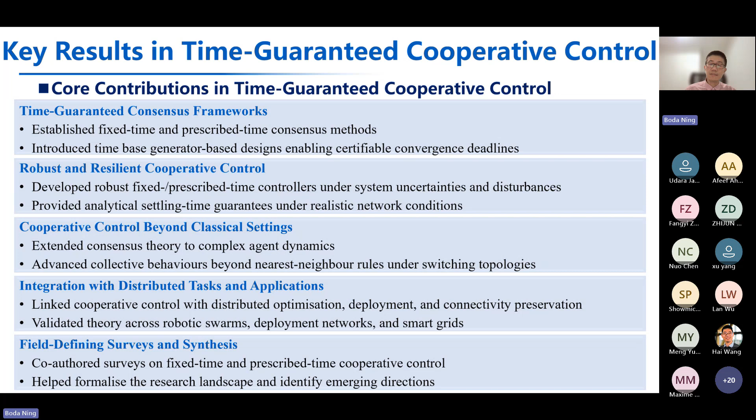And yeah, so this slide just shows our core contributions. Now, I would like to give one simple example to show how the cooperative controller works.

Let's assume an agent i with a very simple dynamic, the single integrator dynamics: x_i dot equals u_i. Here x_i is the state of the agent, and u_i is a controller to be designed, and the cooperative control of consensus can be achieved by using u_i equals the negative sum from j equal 1 to n of a_ij times

(x_i minus x_j). So here the key part is a_ij is a weight between neighboring agents from x_i to x_j. With this kind of controller, the consensus can be achieved when the time approaches infinity. So this is a conventional cooperative controller u_i. I just want to take this as a simple example to illustrate the motivation.

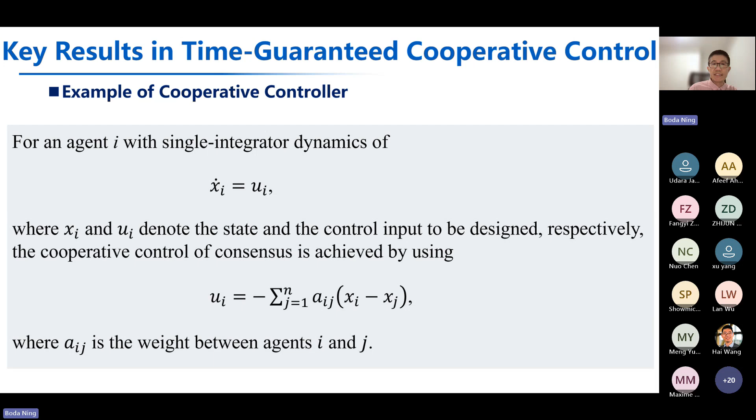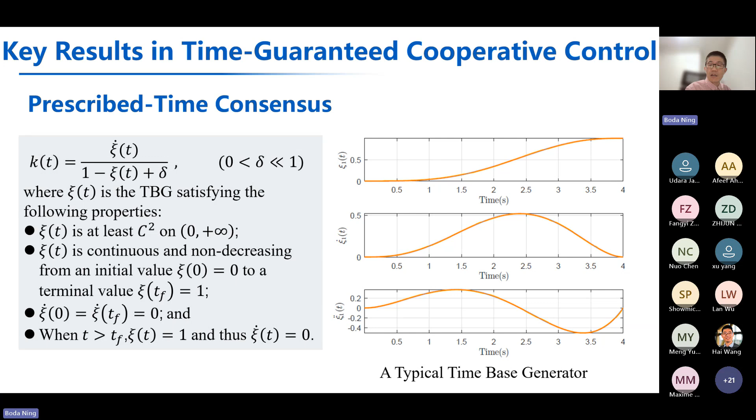So based on the TBG, we add that part on top of the original consensus controller. Basically we introduce this time varying gain when we're doing the summation. In this case, the settling time, which we call T_f, will be a prescribed time instant for arbitrary initial conditions.

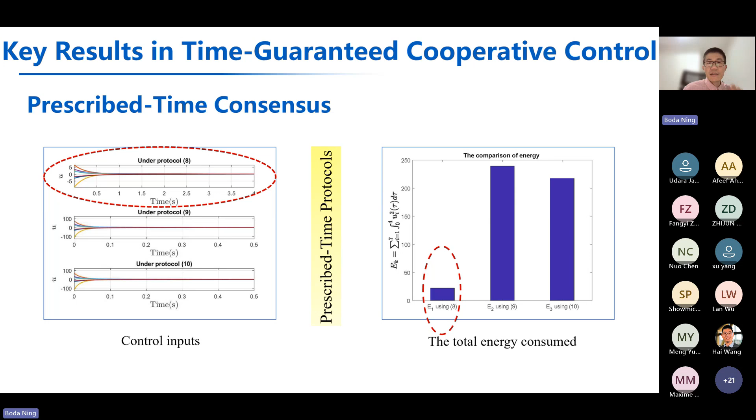Also on the left hand side, you can see the magnitude of the maximum control input is about 5. When using the fixed time one, the maximum magnitude is almost 100. So that is the key difference between the fixed time and prescribed time controllers. We have talked about the difference between the fixed time and prescribed time cooperative controllers, and we have applied those cooperative controllers to different application areas.

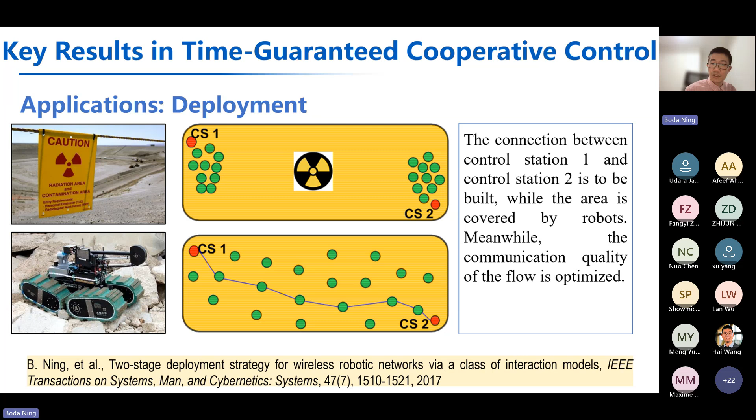And we also apply the controller to the application area of deployment. This is quite similar to the previous application of dispersion, but in this case, we consider 2 different groups, and those 2 groups will merge to cover a big area, and also build some communication flow to make sure the communication quality between CS1, the control station 1, and the control station 2 is reliable.

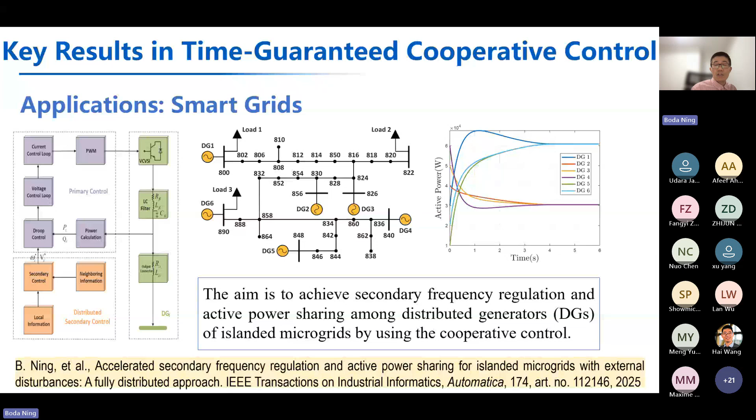And also we have applied our cooperative controllers in smart grids. For smart grids, the target is to achieve frequency regulation and active power sharing among the distributed generators. For example, in 2025, we published our latest results in this area using fixed time secondary frequency regulation controllers to achieve the frequency regulation and active power sharing for microgrids with some disturbances. Also, our approach is fully distributed without using any global information.

And also, I want to emphasize we have applied our controller to cable-driven robots, and this is a very interesting topic that was done when I was at Swinburne between 2020 and 2024. This is an interdisciplinary project. It combines civil engineering and automation engineering. We design cable robots to achieve 3D concrete printing.

And I have a small video here. You can see in the middle there is an effector, and that is controlled by eight cables. It can move very smoothly in the lab. And the middle picture shows we have already printed some concrete samples.

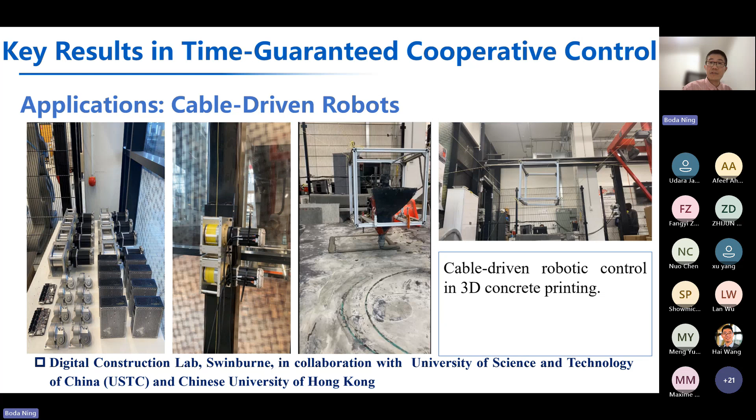But because in 2024 I moved to Auckland, this project was discontinued after I moved. But anyway, this topic I want to say is really interesting. It's the first time we used a control strategy integrated with civil engineering techniques. So that is cable-driven robots.

Now, I have talked a lot about the cooperative control of multi-agent systems. Now let's move to the second part. I would like to focus on introducing the application to connected automated vehicles. As mentioned before, for multi-agent systems, the agent can be a lot of things: robots, drones, underwater vehicles. So here we consider the automated vehicle as a type of agent.

So here we model this kind of vehicle using third order dynamics: tau_i times the third derivative of p_i plus the second derivative of p_i equals u_i plus omega_i. So this is the model we used for the automated vehicles. Of course, for the vehicles, you can use other dynamics to describe the system.

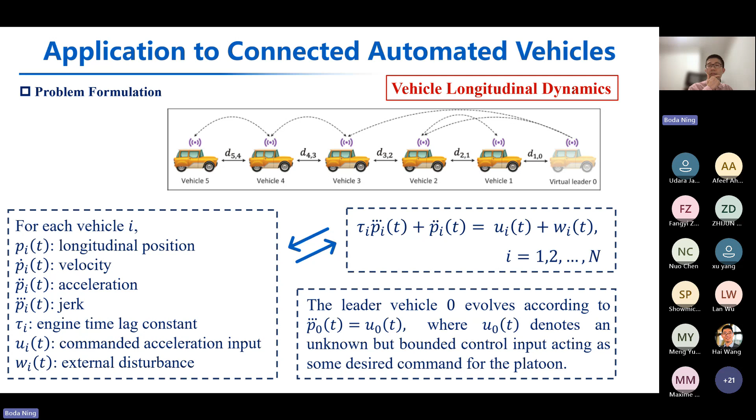And also we need to define the spacing, or we call it the spacing policy. Here each follower vehicle i in this team is required to follow its predecessor i minus 1 while maintaining a desired inter-vehicle distance we call d_i,i-1. And we also use another notation, d_i, as the desired distance. Here we consider a very simple spacing policy, the constant spacing policy, which means d_i,i-1 equals d_0.

So next we consider the information flow for the vehicle team. Two different cases are considered. The first case we call the undirected communication topology. In the second case, we consider the directed communication topology. The main difference between those two cases I can show you using A34, the communication link between vehicle 3 and vehicle 4.

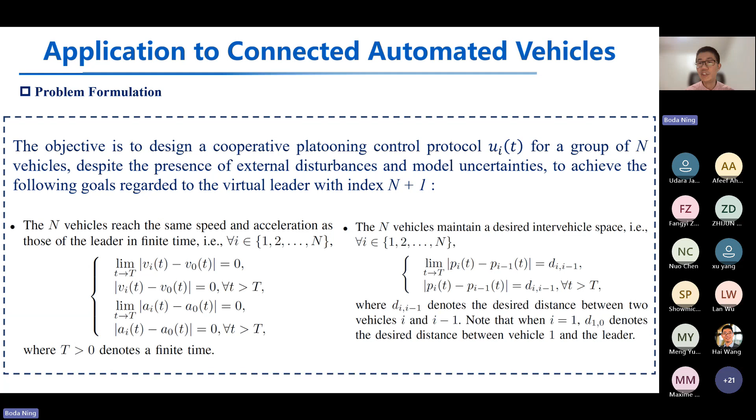On the other hand, we want to make sure that the team, all the n vehicles, can maintain a desired inter-vehicle spacing, which means the inter-distance d_i,i-1. So here p_i minus p_(i-1), the distance will be equal to d_i,i-1 when t is bigger than uppercase T. So this is the problem.

Based on the observer, we further construct a nonlinear variable Si in this form, equal to e_ai plus an integral term. Based on this Si and the previous observer, finally we can design the controller at the bottom. And here for Ui, you can see we also have another time-varying parameter, alpha 4(t). So alpha 1, alpha 2, alpha 3, and alpha 4 are to be designed later.

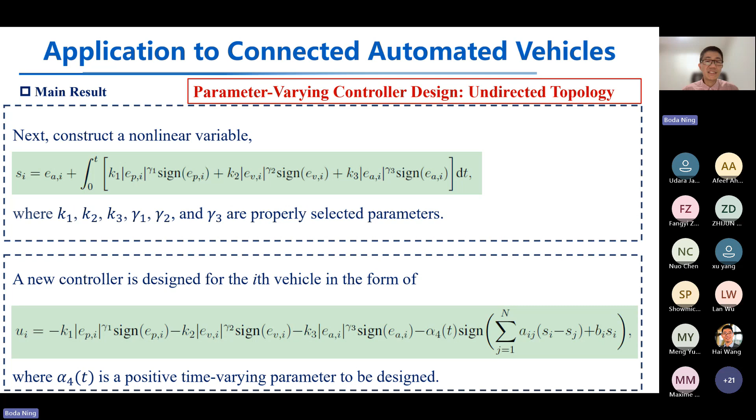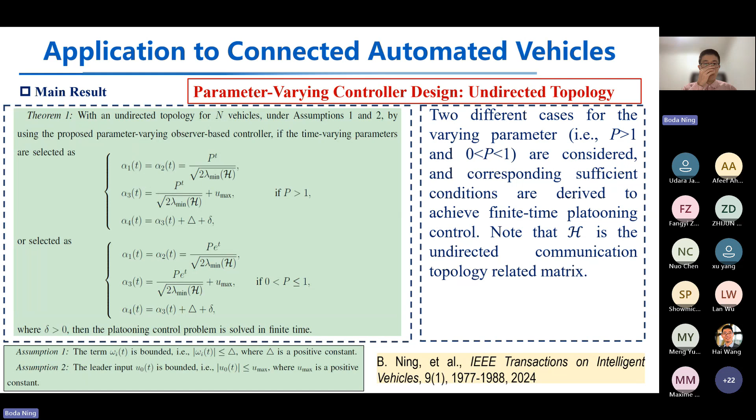Now, the main result of Theorem 1: we can design those four time-varying parameters as shown in this slide. Here we consider two different cases. The first case is p larger than 1. The second case is when p is between 0 and 1. For different p, we design different time-varying parameters for alpha 1, alpha 2, alpha 3, and alpha 4. And finally, the platooning problem can be solved using the designed controllers.

Next, previously we were talking about platooning control under the undirected topology. If the topology changes to the directed case, we need to redesign the controller. Again, step one, we design a distributed observer for each vehicle i. Very similar to the previous one, we also introduce three different time-varying parameters, alpha 5(t), alpha 6(t), and alpha 7(t). Based on this observer, the new cooperative platooning controller under the directed topology is designed in the form of Ui on the right-hand side.

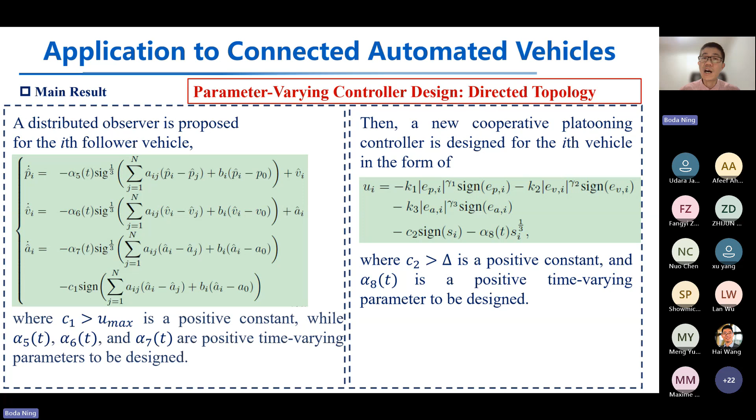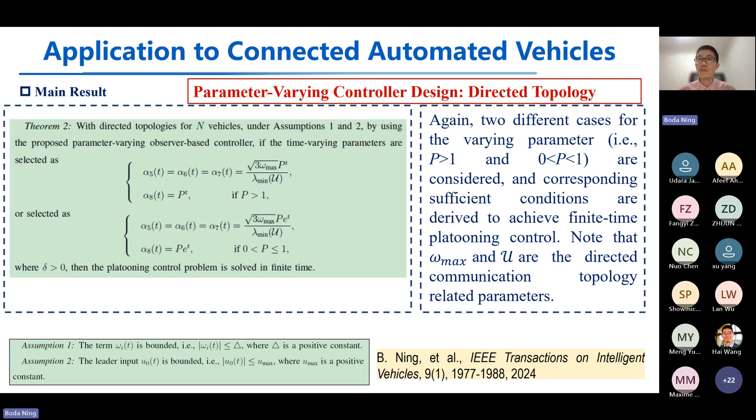And those four different time-varying parameters are designed in the form of alpha 5, alpha 6, alpha 7, and alpha 8. Again, for the two different cases of p larger than 1 and p between 0 and 1, we assign different time-varying parameters, and finally the platooning problem can be solved under the directed topology.

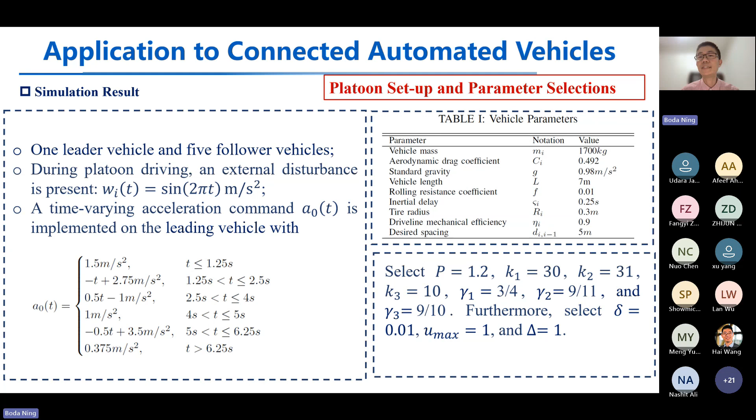Next we show some simulation results. In the simulation, we consider a group of 6 vehicles. As mentioned before, we have 1 leader vehicle and 5 follower vehicles. During the platoon driving, an external disturbance is added to the system dynamics. The acceleration command a0 is shown on the left-hand side, and some parameters of the vehicles are selected on the right-hand side.

And you can see here when the topology is undirected, which means we set Aij equal to Aji, and both are equal to 1 when the communication link between vehicles I and J is built. And BI is another notation where we assign a constant number of 1 to it when vehicle I can have direct information access from the leader.

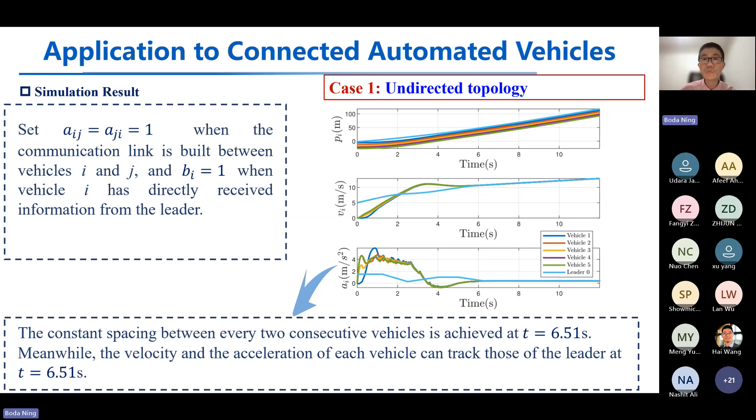Okay, so on the right-hand side is the simulation results. You can see the constant spacing between every two consecutive vehicles is achieved at about time t equal 6.5. And meantime, the velocity and the acceleration of each vehicle can also track those of the leader when t is larger than 6.51. So this is for the undirected case.

Okay, so next I would like to discuss some of the research directions. Because today's topic is time guaranteed cooperative control, one very promising future direction would be control under real-world network imperfections. Right now most of the work has been done under ideal network conditions. For example, when we consider the communication between vehicles I and J, once the communication link has been built, we consider the communication can be done all the time.

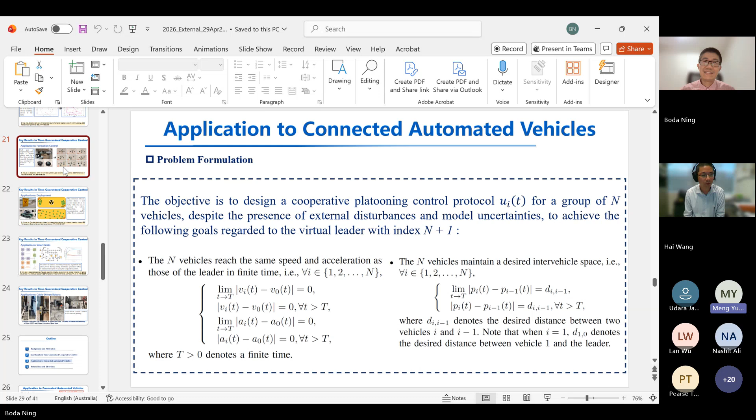Hello, Boda. This is Meng. I actually have some questions regarding the experiment you did. Usually the experiment may involve time delay during the communication, or there might be some model mismatch. I'm not sure if you saw some difference in the time constant you mentioned between the simulation and the experiment. Did you consider the time delay or the model mismatch when you did the experiment? The second question is, is there any time difference when you finish the experiment? What's the difference? Thank you, Meng, for your question.

You ask a very good question. In fact, we also noticed this kind of problem between our theoretical design and the real-world implementation. For example, I mentioned we did some experiments using a team of 6 robots in the lab. We did the simulation first and found that the coordination can be achieved within, for example, 5 seconds. But in the experiment, it takes about 190 seconds. You see the difference. Of course, as you mentioned, there is communication delay. To get the coordinates we use cameras; the image processing also consumes some time, and the computer's calculation takes some time too.

So as a whole, in the experiment the time does not match the simulation, and we have clearly pointed this out in our paper. If you have interest, you can have a look. We clearly mentioned that it belongs to some physical limitation. Of course, we want to improve the experimental results, but I would say it's not easy. But we know the problem, and we do have a plan to reduce the gap between the simulation and experiment. Thank you. Yeah, thank you so much.